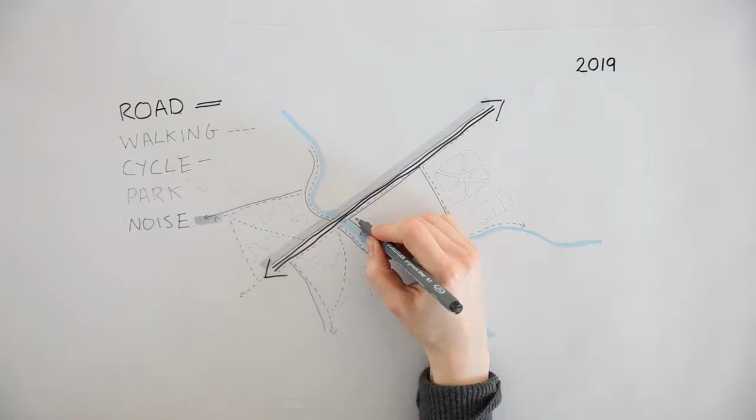On the site we found an engineer's house, an arts and crafts brick building, an octagonal warehouse, the filter beds, the cobbled pedestrian bridge, and ornate cast iron details.

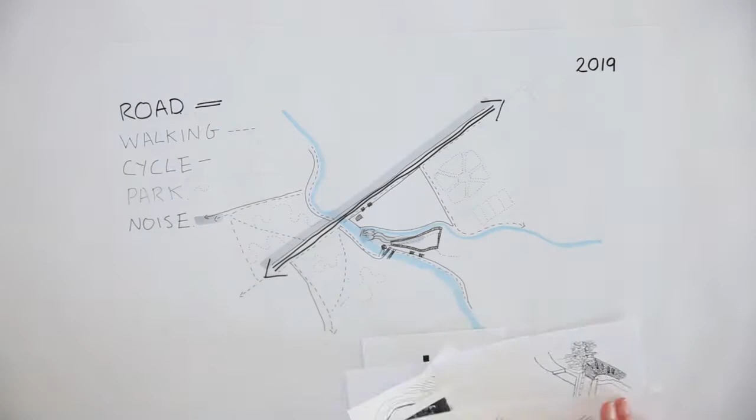We want to highlight points made to us in the last symposium. Where is the story? - Deborah Saunt.

David Conn: What if there's a problem with how we all live? Could we all be thinking more like the people who move, and therefore more likely travel with less and are by necessity required to treat a domestic setting in a careful way?

Now we'll take you on a journey. Let's start with sharing with more through an industrial proposal.

She arrives by bike, alerting others of her arrival from the noise of her footsteps on gravel. She is welcomed by a protective resident goose. A swift manoeuvre of key to lock, overlooked by workers' windows, her bike is safe.

An unusually early drop-off from the waste material vans reaffirms that the day will be busy. As she steps over the DIY paving, she is reminded of when she laid down these earthly materials. A swipe through the gates, dappled light from the skylights floods the atrium. It's a warm welcome.

Surprising an office romance with an apologetic hello, up the staircase she goes, shaking hands with the building from the reclaimed leather-wrapped handrail. Background music plays. Work has begun. A sizzling hot espresso is needed.

The public flow along on a raised path, giving division between public and private. Glass doors open up portals to various activities, from cleaning and sorting goods.

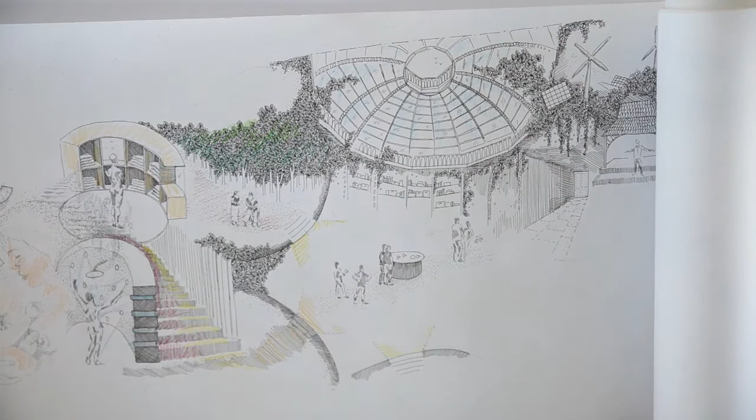Close neighbours also enter the space. The morning room is brighter, grander, and rewards the friends for having breakfast together. Light from the large glazed ceiling wakes them as they gather.

They care for plants and monitor energy. A display for shared belongings surrounds them. A corridor leads to an open courtyard on the edge of a shared footway.

The day continues, eventually reaching evening. He returns home to prepare food.

Today, he cooks with his neighbour, sharing stories, recipes and knives. They move to the grandest of all their shared spaces, the dining hall. Big tables earlier used for homework and games are now full of food and surrounded by people.

The grand room rewards them again for being together. The morning room is now an evening room, holding young parents and their wine.

He moves into a lower private space decorated with sentimental items. A small window connects him to the footsteps outside while protecting his privacy. Above him is a deck to overlook activity below.

When ready for bed, earth walls ground him. Finally, landscape.

A Saturday afternoon, she cycles from a busy road. A brick house with large brick chimneys becomes visible. Stepped seating filled with people connects the house to the river below. A wide gate welcomes her in, and in the ground, an old piece of railway hints at an industrial past.

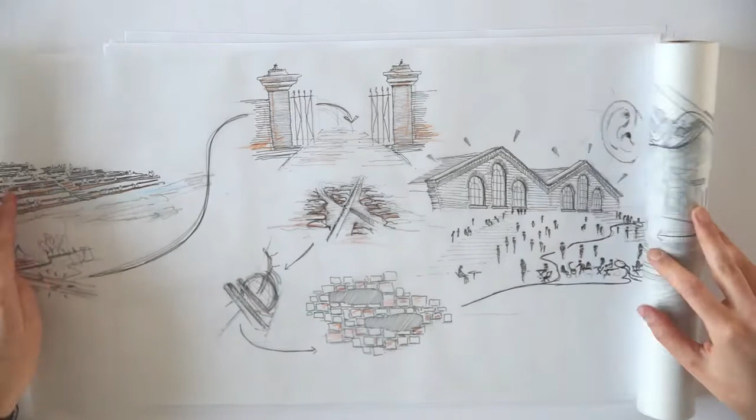She leaves her bike and walks across the cobbles. She discovers a square displaying a range of activities. Children play in the distance. Old warehouses line the square, and arched windows release echoes of woodwork from within.

She moves to the stepped playground by the edge of the river. Water crashes down around children playing, overlooked by balconies of modest homes. The cobbled path transitions to softer ground as she moves through the housing. On the edge of the water, she hears the river.

Walking past allotments, she hears a bird song. Turning the corner, a small bridge crosses the waterway, its handrails wooden and soft. An avenue of trees leads her from the bridge to another remnant of an industrial past. A tall tower of activity stands over the water where boats are docked. Moving closer, she sees the falling water of the weir, powering the tower and charging the boats.

How can we apply these experiences architecturally? We tested several iterations of our sharing, living, and landscape areas on the site.

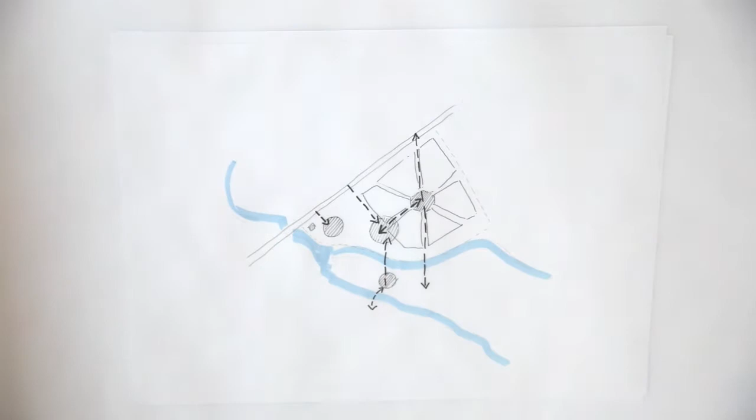First, we take the shape of the historical reedbed below and fill this with housing. Next, applying a grid to the site gives maximum homes but minimum connectivity to the water's edge. Then, cutting canals through the site using the shape of the reedbed below.

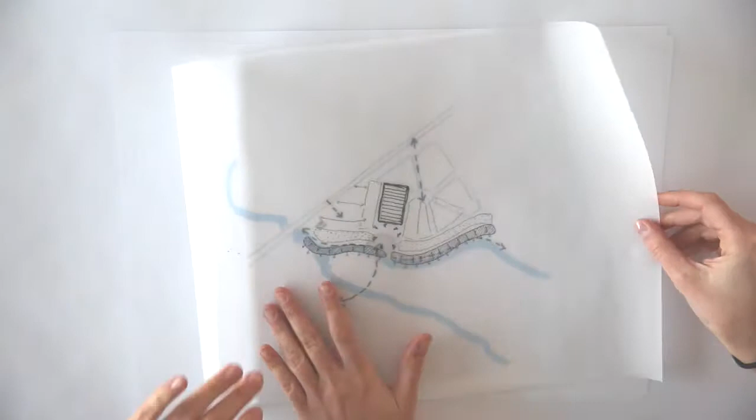Drawing water through half of the site and floating homes above. Taking the longest edge of the waterfront and applying housing to it. Then, considering viewpoints from walking routes, the houses are arranged along streets with shared gardens. The industry is connected to the housing through a maker's square and a playground.

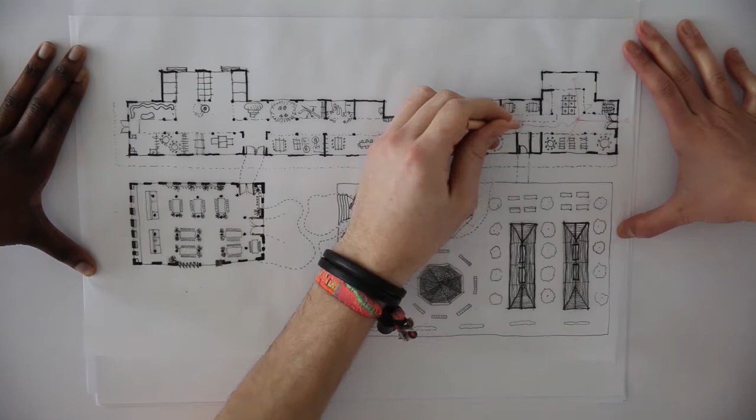The industry and public spaces: deliveries enter, are sorted and filed to be processed, looking at the Shaker community on how they promote reusing items. Flowing through the design lab, the public are overwhelmed by creative activity.

The architecture hits these various SDG goals. Inspired by New Lab in Brooklyn Navy Yard, the public flow towards the cafe, inspired by the Lisbon Time Out Market.

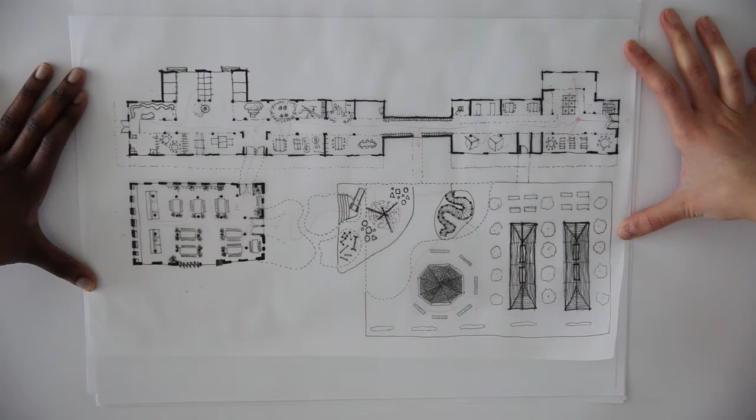A local bandstand, a platform for local artists, a wide public square like Gillett Square in Dalston, a great place for people to be immersed in. First floor, promoting new knowledge to the public about recycling wasted materials.

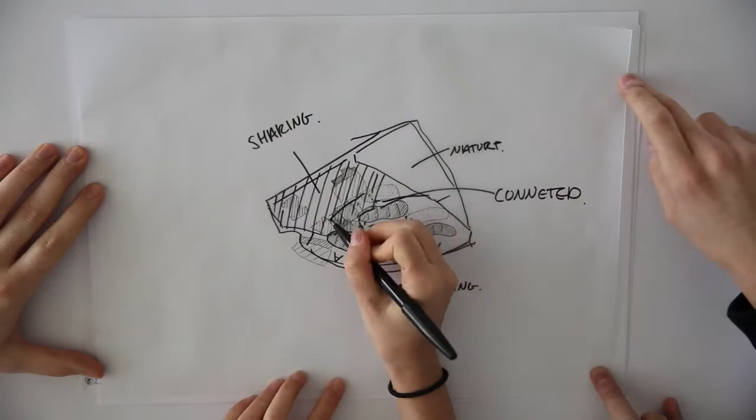Housing: our concept contains 4 dwellings with 4 typologies - a family, a couple, a single occupant, and an unknown resident, as we don't want to socially engineer this. There is no hierarchy between the dwellings.

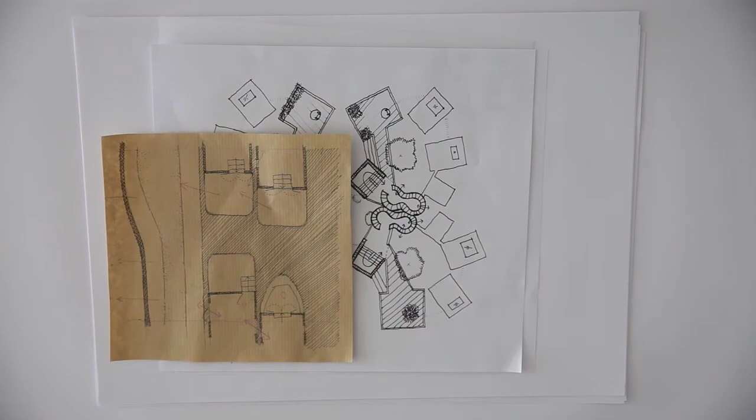Each dwelling is arranged around a private courtyard, promoting outdoor living. Private spaces are embedded below ground level. The morning room is the first level of integration with your immediate community, with glazing and shared storage. Whilst the plan recognises the importance of privacy, it also promotes interaction through the provision of shared spaces, similar to life on the river. A first floor balcony references a boat's deck.

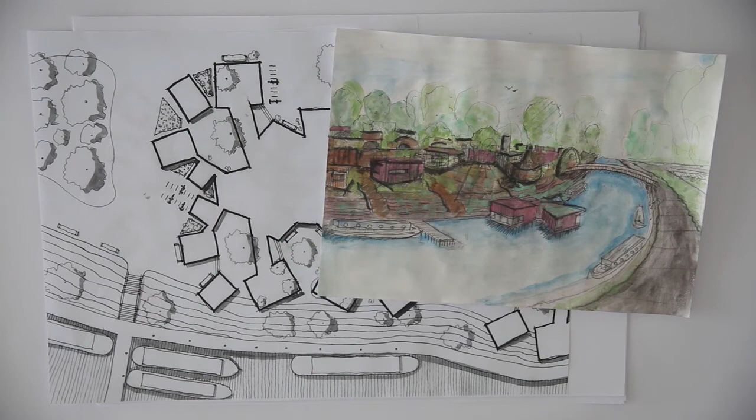The plan spreads, allowing views between dwellings and alcove spaces for growing, encouraging residents to inhabit the public frontage. We aim to blur the distinction between nature and architecture with buildings made using natural materials that sit below the tree line. And to the in-between spaces, we have 4 entry points.

The first connects to a public square. Granary Square, Gillett Square and Spitalfields Market gave you a sense of scale. Past the square are the children's play areas.

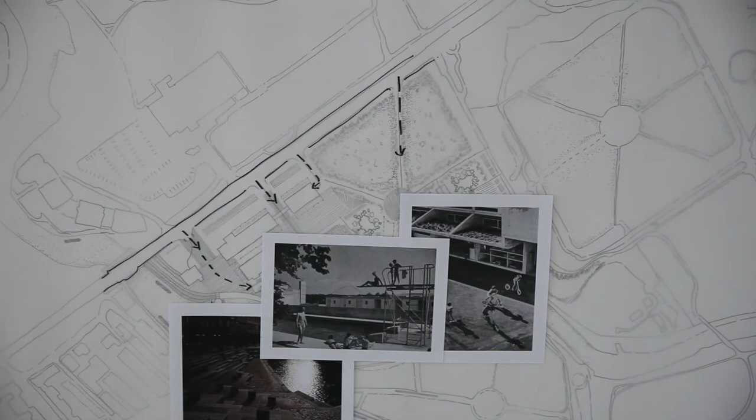To the north, we have reinstated the old filter beds, creating an avenue of trees leading to a sculpture park. Connecting to the south, the peninsula and warehouse are reimagined to promote waterside activity.

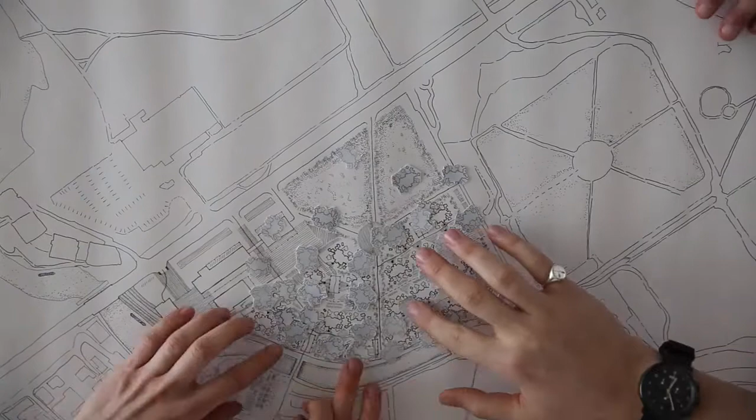Throughout streets, leading through vibrant living communities, the dining halls are shared between 4 clusters. The public are invited to use these spaces. These clusters have the potential to grow in density.

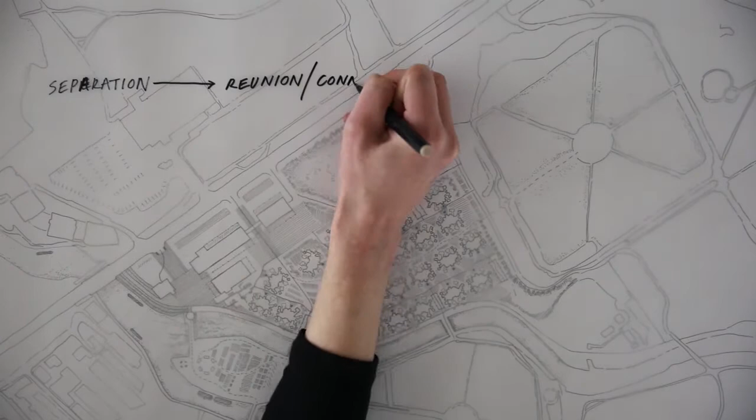To conclude, in order to challenge the orthodoxies of living in London, one has to balance the notions of radical living with sustainability. Change is needed.

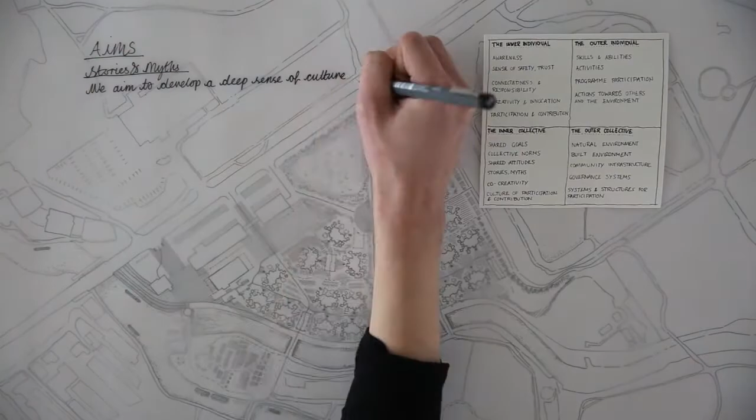Our aims of moving the project forward are stories and myths. We aim to develop a deep sense of culture and history. The architecture should heighten our awareness of our surroundings through narrative and metaphor.

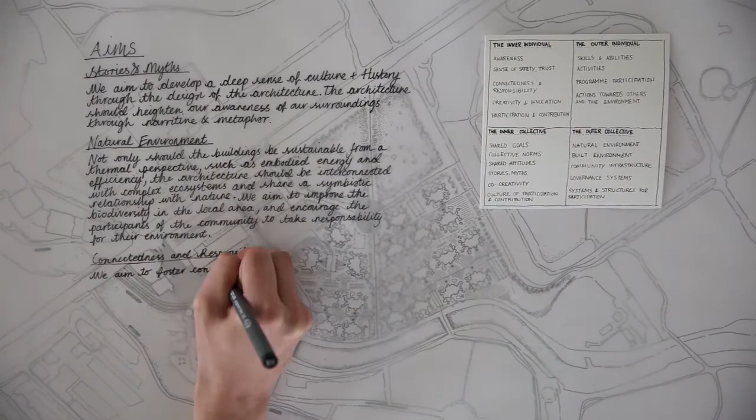Natural environment: not only should the buildings be sustainable through embodied energy and efficiency, they should be interconnected through a symbiotic relationship with nature. Connectedness and responsibility.

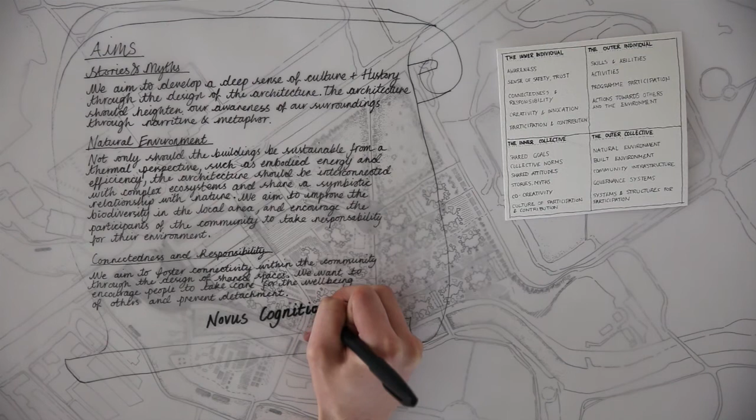We aim to foster connectivity within the community through the design of shared spaces. We want to encourage people to take care of others and prevent detachment.

Through the romance of our site, the boating community and the new knowledge gathered, we have generated poetic and symbolic journeys, which have in turn built our architecture.

We're proposing a new way of living in London through encouraging living with less, sharing with more, and connecting with nature. To enable such a lifestyle, these 3 elements must be intrinsically linked, and therefore it is this connection that our think tank aims to explore further.